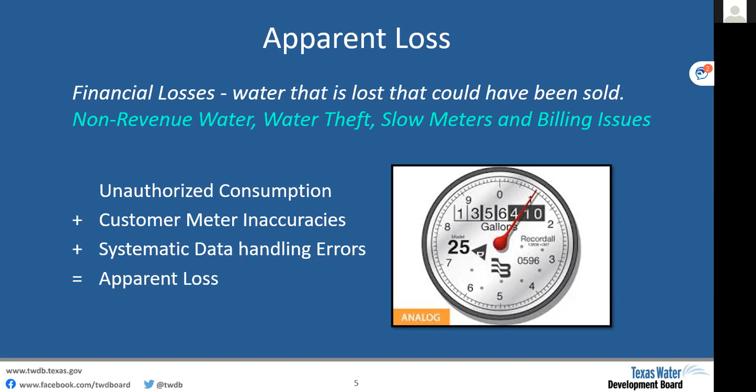And with an apparent loss, you're losing revenue because of theft, inadequate billing processes, and meter accuracy. You may want to consider a meter testing and replacement program to get a good idea on the accuracies of your customer meters and also to determine the need for a replacement program.

When it comes to real loss, you're losing water that you've treated. Make the best estimate of the leakage. Start tracking when you repair a leak, when you respond to a leak. We have a water loss calculator, leak calculator, on our website that you'll find very useful. Calculate what that leakage is costing you as well.

And then take a look at possible leak detection approaches. Do you want to do a survey of your distribution system? This could be done in-house. We have leak detection equipment at the Texas Water Development Board we can lend you. You may want to contract with a consultant, a third party or such.

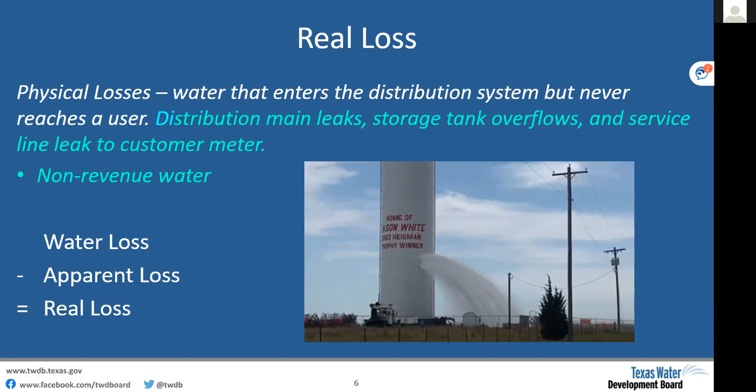Also, performance indicators. Take a look at the technical and financial side of that, and also use these indicators to help develop some history and track your performance from year to year. One of those indicators is Infrastructure Leakage Index, ILI. This is really appropriate for larger systems, those with more than 3,000 connections.

And then we have the cost of apparent loss. And again, that's lost revenue. And then also the cost of real loss, the production cost of providing water. Certainly that's going to add up to the cost of total water loss. And these are all important because, again, taking a look at it from the financial impact that water loss is having on your system. We have total water loss per connection per day.

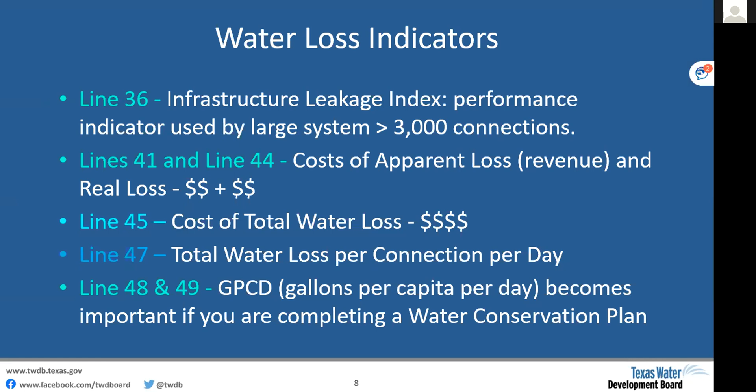And then also we have gallons per capita per day, also for total use within your system, but also a component of that as water loss in gallons per capita per day. Probably the best metric to use is water loss per connection per day. And again, this is going to be appropriate for your system and being able to track your water loss from year to year. You'll also be able to track activities and your mitigation of water loss and see what success you might be having. So when you take a look at the water loss, what are some of the common data issues you may want to take a look at?

Well, if you have a negative value for total water loss, that means you lost and sold more than you put into the system. So in other words, you made water, and certainly that would be nice, but it really isn't possible. If you have a negative value for real loss, it's possible that you underestimated your customer meter accuracies. You may want to go back and take a look at what you entered there. If you have a negative value for unreported loss, you may have overestimated your leaks and breaks. Again, if you're not tracking that, it may not be best to estimate that. And so again, another area of taking a look at the data that you put in.

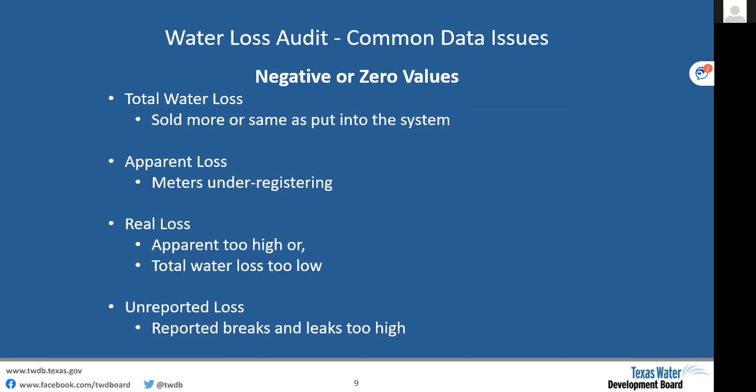What does this data also tell you? Again, reviewing that. If your system has an infrastructure leakage index and it's showing to be below 1, that's not very likely. You probably have a data issue somewhere within your audit. You need to go back and take a look at where that may be happening. If you have very high or very low water loss, this also indicates a possible data issue that you may want to take a look at. If you have high or low cost of water loss, double check what information you put in for the retail rate of your water, as well as the production cost of your water.

Sometimes the information that you entered in your water use survey, which then auto-populates into the water loss audit, has a problem or an error when you entered that. If your input equals what you billed, again, that goes right back to you're going to end up losing and selling more in the water loss audit. Again, not possible. You want to be sure that the same units were used. The water loss audit is in gallons. Sometimes if you enter your information into the water use survey in 1,000-gallon units, that may not transfer appropriately. So you may want to double check that as well.

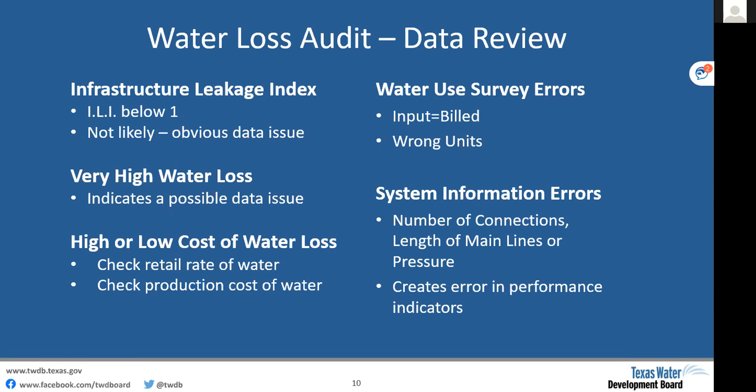Also, in entering some of the base information in your water loss audit, it's real important to make sure that you have a good grip on the number of connections you have, the length of main lines and pressure, because all those elements are used when calculating your performance indicators.

So part of the water loss audit is also a self-assessment of the data that you added. This is considered validation. And basically it's a process of validating each of the lines of data that you enter and the processes that you went through to gather that data. Doing this will also help you identify ways to improve that data and how that data is gathered. So again, this is as important as anything else. Again, useful to you to be able to take a look at what your water loss audit is saying and how you can go ahead and improve that data and start mitigating your water loss.

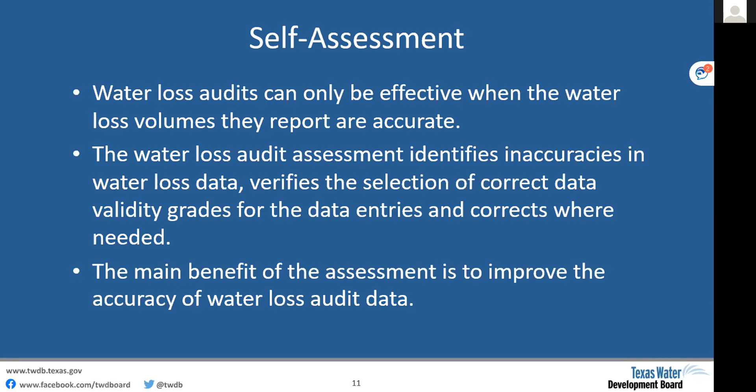There's also a lot of discussion around the country about third-party validation. These are individuals that are trained to validate or take a look at water loss. They meet with public water systems to go over their water loss audits to be able to determine, again, the steps that they took and what may need to be taken to improve that data.

We currently have a contract to have a water loss validation study. We're working with 10 utilities from around the state and looking at their 2020 water loss audits. And again, to get a good idea of the process that utilities go through to collecting that data. And so we can make some recommendations about some of the opportunities and challenges going forward when it comes to water loss and water loss validation.

So once you have your audit, go ahead and you need to start determining those steps to take action. Basically start to mitigate your water loss. Starting point, create a trend analysis using your historic water loss audit information. Have a good understanding of how water loss can be improved through data collection. Take a look at the approach and the initial implementation of that data gathering. It may also include system-wide taking a look at performance standards and refinements on how you go about with your audit.